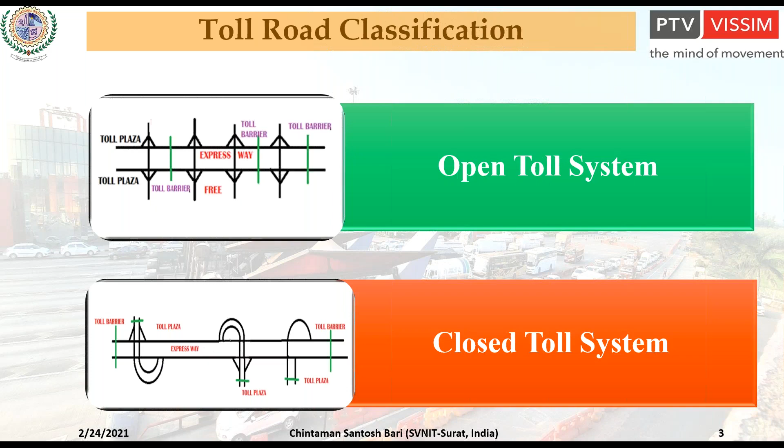In India, we have two types of toll collection systems: open toll and closed toll. In open toll, we have to pay toll after a particular distance. But for a closed toll system, we have to pay toll for each entry and exit. Since 2014, we have implemented FASTag, an electronic toll collection system, but we also have the manual toll collection system.

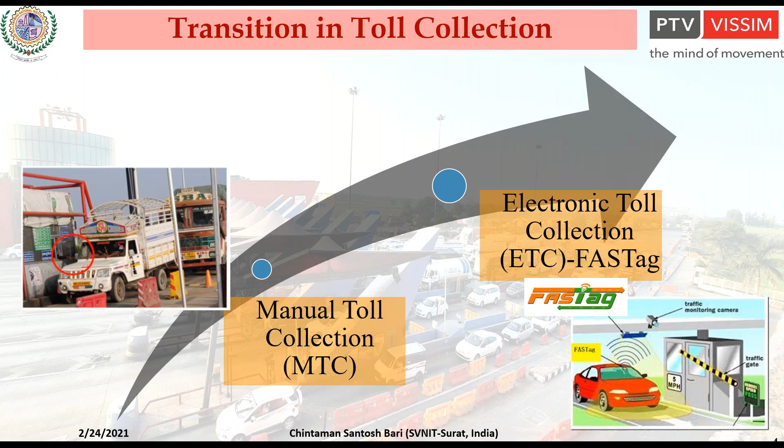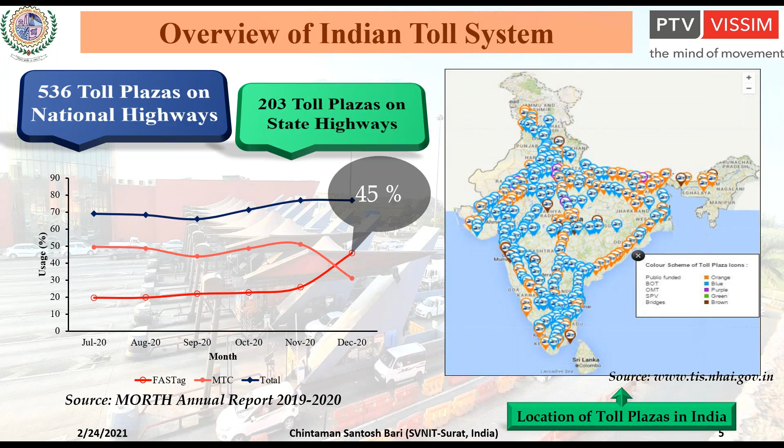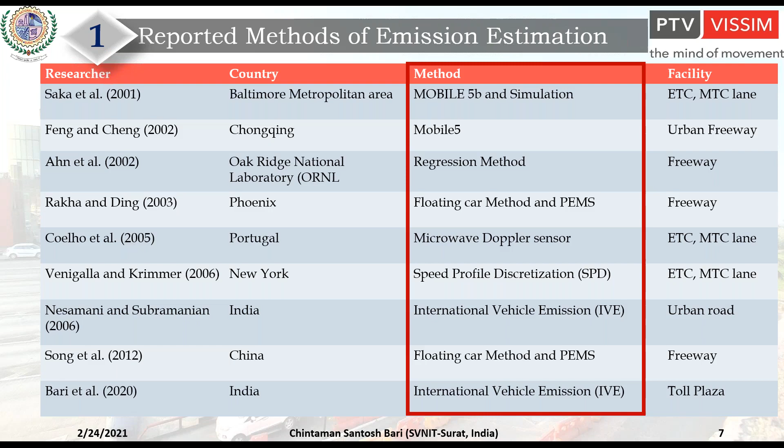For the present study, different literature has been reviewed for emission estimation. Different researchers from different countries carried out emission estimation using different software such as IVE, simulation, and MOBILE on different facilities. But emission modeling at toll plazas under mixed traffic conditions has not been studied yet.

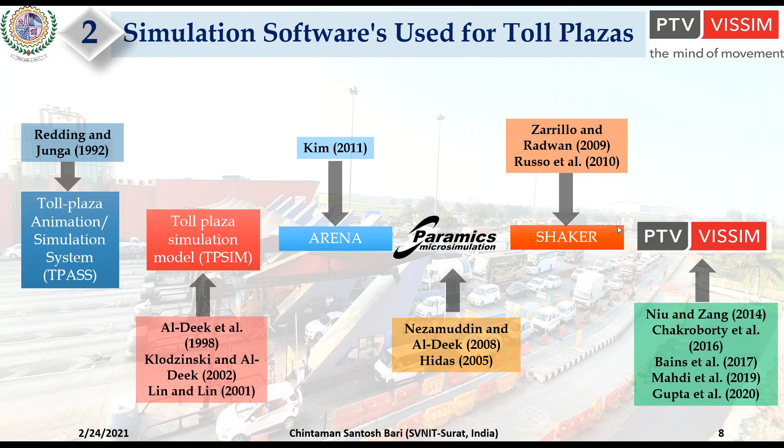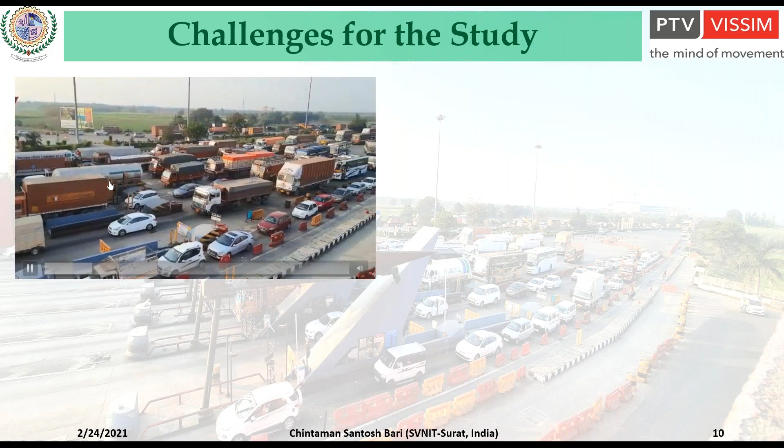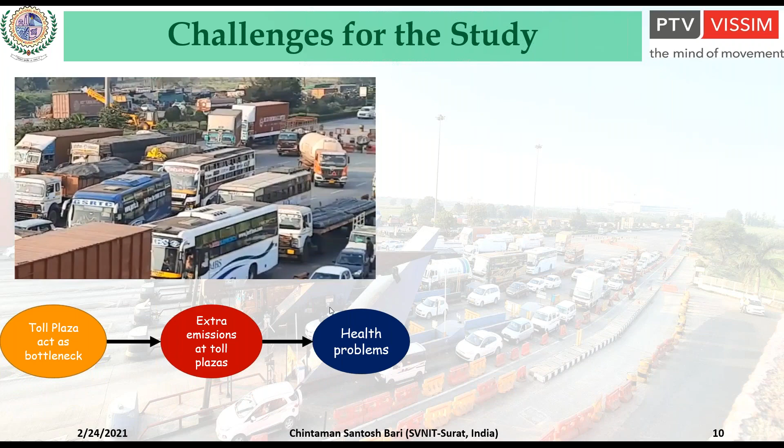So what is the need and challenge for the study? Considering Indian traffic, long queues get developed in peak hours, which causes extra emissions at the toll plaza and health problems to the toll booth operators and daily commuters. Although emission estimation is a time-consuming and laborious process, it is an important one.

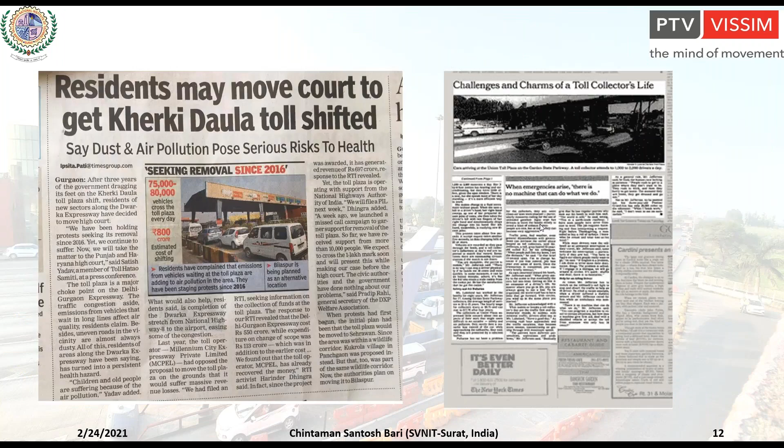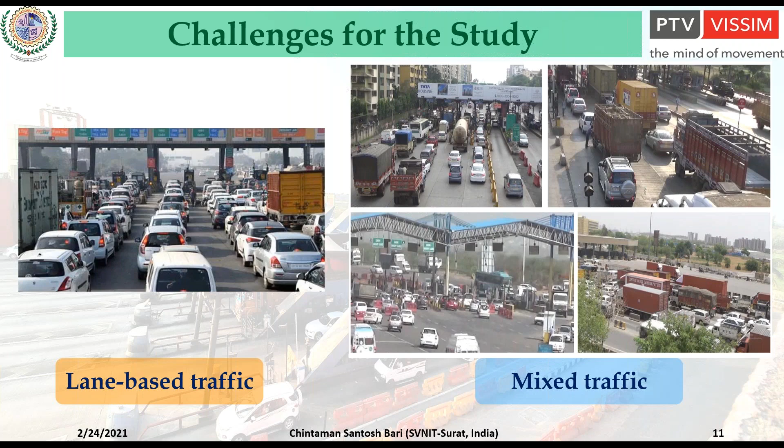If we consider developed countries, we have lane-based traffic. So what is mixed traffic? Mixed traffic means dedicated lanes are present at the toll plaza for each class of vehicle, but due to driver behavior in developing countries like India, different vehicle classes present in each lane cause mixed traffic conditions. This affects service time and thus toll plaza operation.

Further, these toll plaza operations, the delays, and the extra emissions cause health issues to toll booth operators and daily commuters. So the focus of the present study is to develop a calibrated microsimulation model for the MTC method under mixed traffic conditions.

Further, to analyze the impact of presence of toll plaza on the emission parameter at national highway, to develop the regression equation for easily estimation of the emission at toll plaza, and to estimate the emission based passenger car unit factor during MTC and FASTag method.

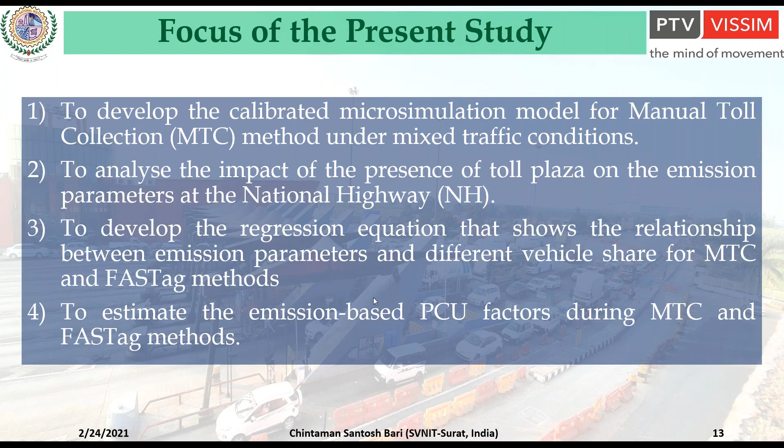So the question may arise, why micro simulation model? As 100% penetration is not yet achieved in Indian traffic condition. Second, the mixed traffic condition is creating problem for the toll plaza operation, which has to be incorporated while the analysis. Third, policies depending upon only observation lead to variable result and thus can be dangerous in terms of monetary loss. Hence, we use the micro simulation software, which is a cost-effective tool, which can help to give an idea well before planning all the things.

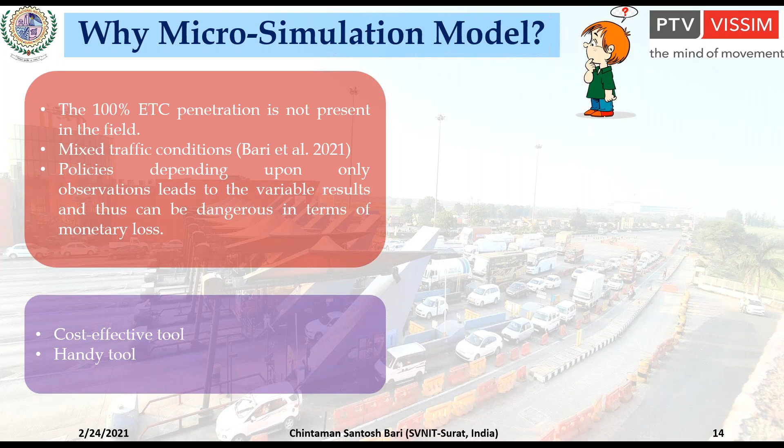Second, it is a handy tool. In our study, we have used PTV VISSIM. So the question is, why PTV VISSIM? It is an effective tool for studying the mixed traffic condition. Second, many researchers have applied PTV VISSIM for toll plaza operation, and it is very easy to understand. Hence, we use PTV VISSIM for our study.

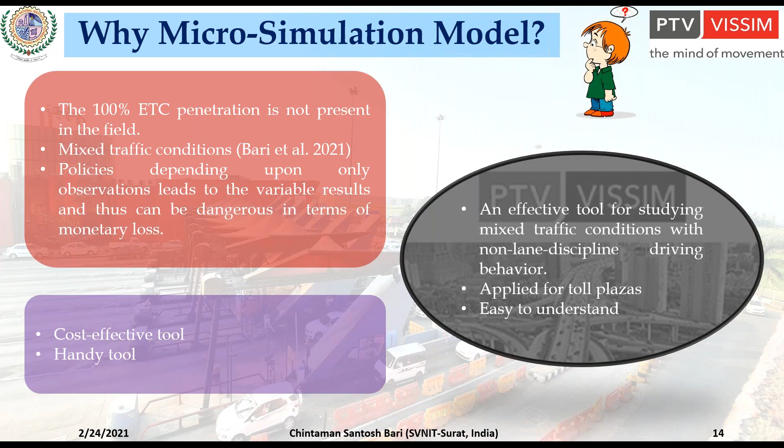For the present study, the methodology is as follows. From the challenges, we have set the objectives. Then for development, we fix that analysis should be done with the micro simulation, and hence for micro simulation software development, we have collected the data with the help of videographic survey and performance box. In model simulation development, the important aspect is calibration and validation. After that, the scenario analysis is done for emissions, followed by results and conclusion.

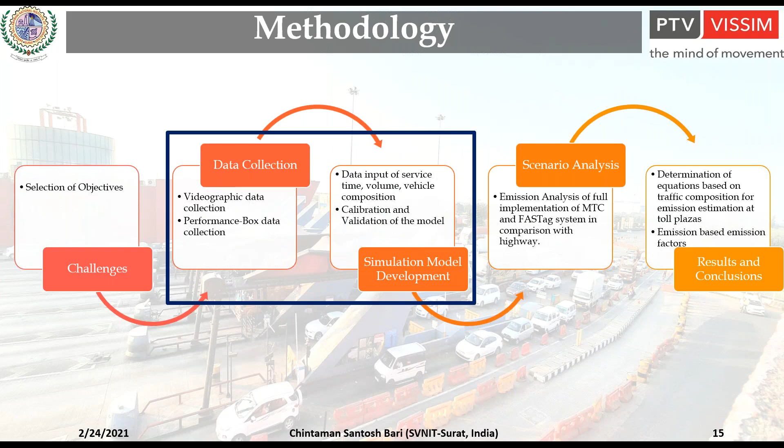Considering the methodology part, the data collection and simulation model development is a very critical part. So what is the requirement for simulation? For requirement of simulation, the field data is necessary. For the present study, the field data is collected at Ghoti Toll Plaza.

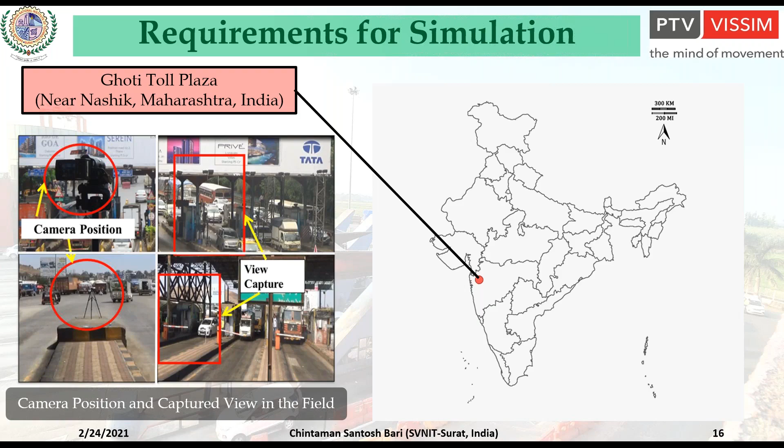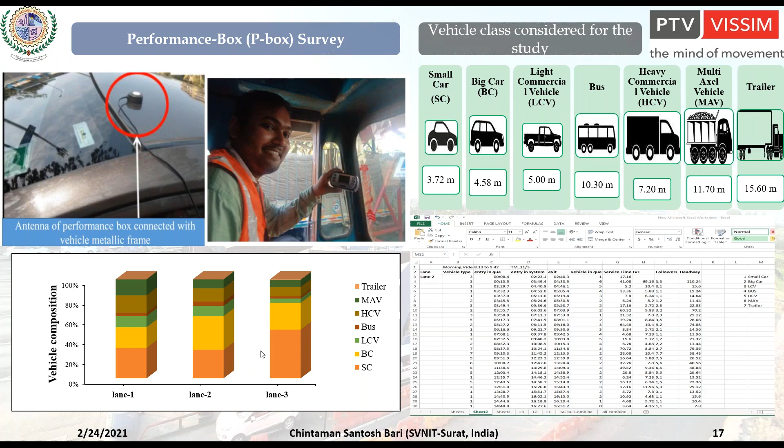So moving forward, the base model development in VISSIM. For development of any model in VISSIM for toll plaza operation, we require 3 parameters: geometric, traffic, and simulation. The geometric parameters such as approach lane, toll booth location, are taken from field observation. Traffic parameters such as vehicle type, arrival volume, speed profile are taken from the field data collection, that is videographic survey and P-box.

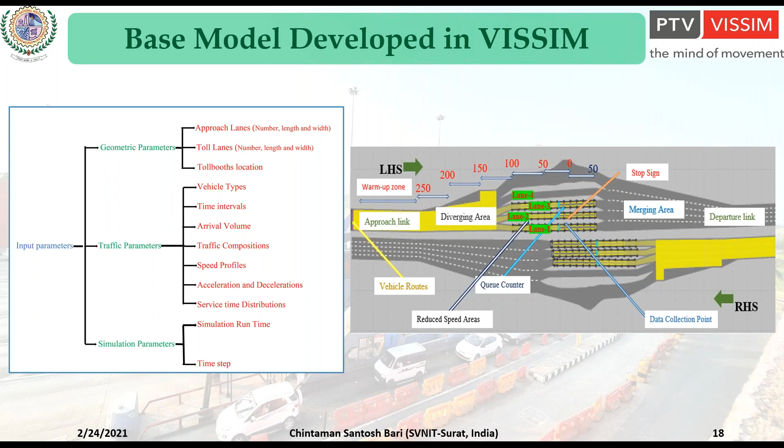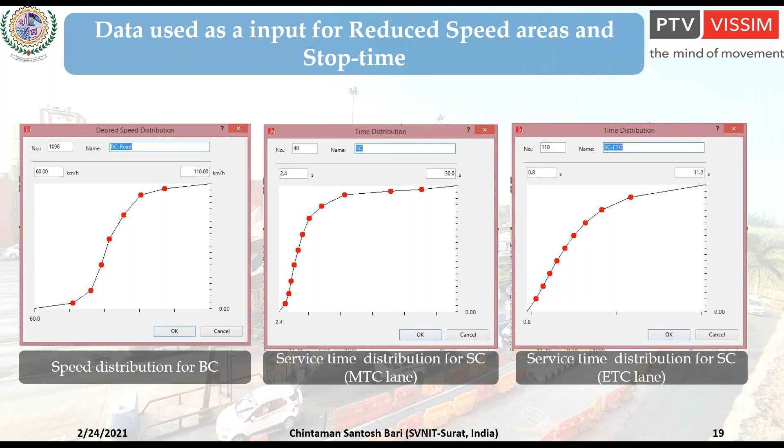The figure shows the developed VISSIM model, which consists of different links, stop sign, reduced speed area for each 50-meter section, which is incorporated for the service time and the queue delay operation. This is the input which is given to VISSIM for the reduced speed area and the dwell time distribution for stop time in the form of CDF.

The important step is the calibration and validation of the VISSIM model. Here we have used the Wiedemann 74 model, which is used by most researchers in the study for the toll plaza operating under mixed traffic condition.

Here, first we define the base model, then the model is run, then the field and simulated values are compared. If the field and simulated values are under the prescribed limit, which is checked by the statistical test, in our case we have used the GEH statistic, then those factors are considered. If not, then iterations are done again and again till we reach the proper calibrated value.

Now for validation, the GEH statistic is used, and it says that if the value is below 5, then the model is well calibrated. Here, as you can see, the GEH statistic value is 1.56 and 1.01, so we say that the model is well calibrated.

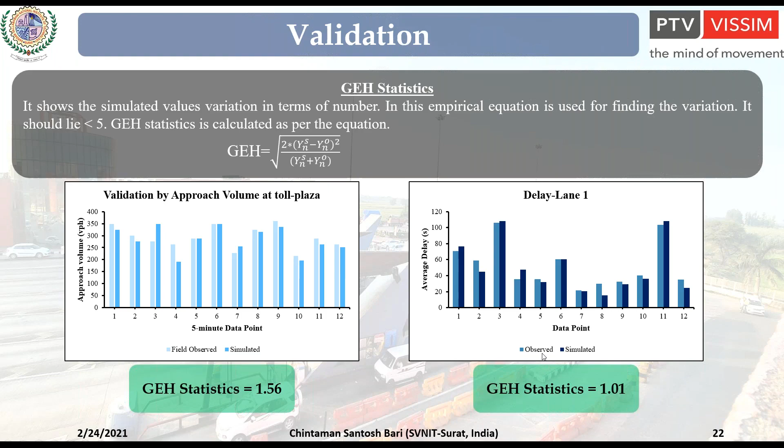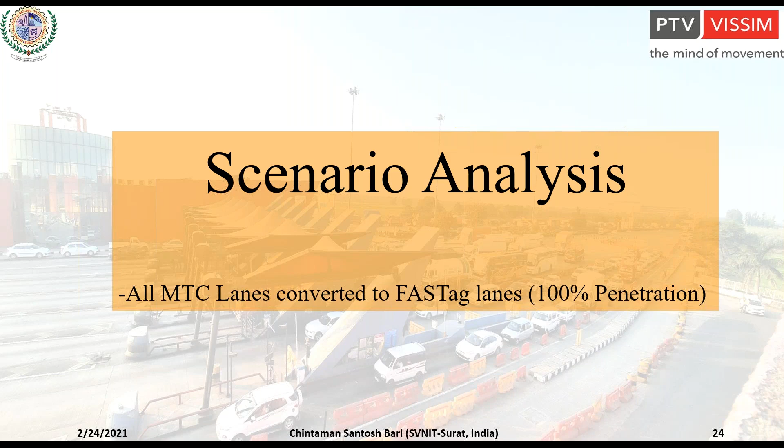So the main step is after scenario analysis. Here, as we are not having 100% penetration of FASTag lane, we have converted all MTC lanes to FASTag lanes. Here, first impact of presence of toll plaza on emission is carried out. It is observed that due to the presence of 100% MTC lane, the emissions are maximum for each category.

That is carbon monoxide, nitrogen oxide, and volatile organic compound. On comparison with the MTC lane, the full implementation of FASTag decreases emission by 317%. These equations are developed for easy estimation of the emission on the field for different category of emission, such as CO, NOx for MTC and FASTag lane.

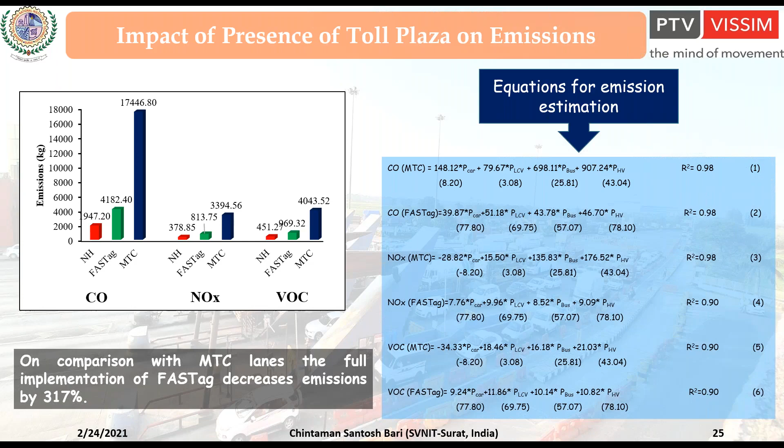Lastly, the important thing is the development of emission-based passenger car unit. EPCU is the emission of the ith category upon emission of the car-th category. It is seen from the figure that the EPCU values of the MTC lanes are more than the FASTag lane. If we consider the EPCU of MTC lane, it is 1.84, 5.02, and 5.14 times more than the FASTag lane.

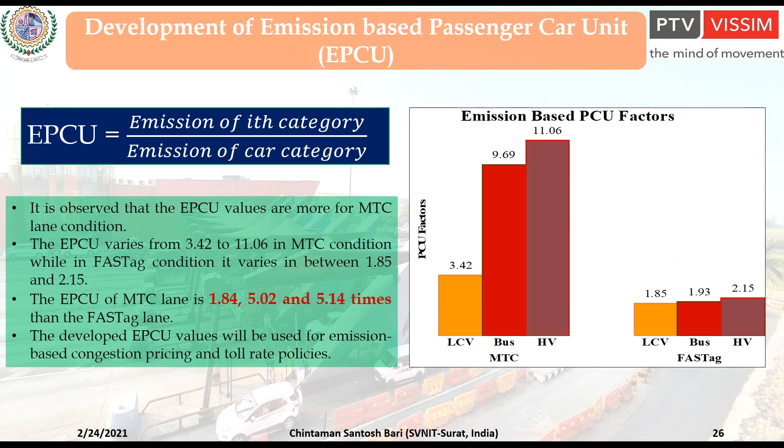So why is there a need for EPCU? The developed EPCU values will be used for emission-based congestion pricing and toll rate policy.

So these are my inferences from the study. The PTV VISSIM micro simulation model accurately represents the toll plaza operating under mixed traffic condition. Further, the results show that operating the toll plaza on MTC method shows an increment of emission of 96%.

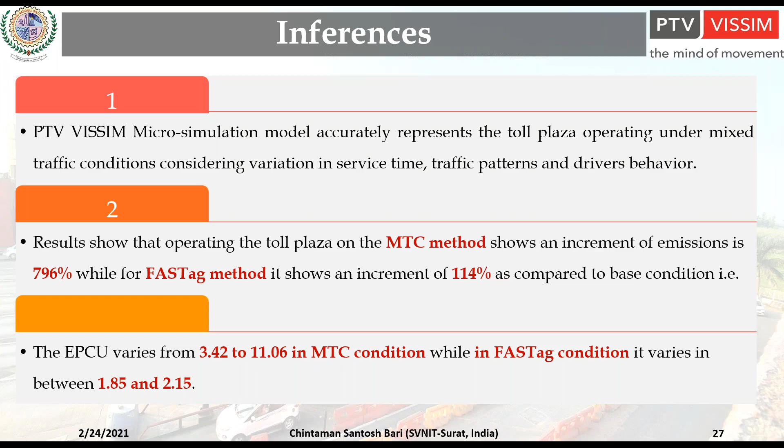While for FASTag method it shows an increment of 114%. The EPCU varies from 3.42 to 11.06 in MTC condition, while in FASTag condition it varies between 1.85 and 2.15.

So way forward, in the present study we have received a grant from the Government of India and Government of Germany for the warrants for automation of toll plaza under mixed traffic condition. My project guide is Dr. Ashish Dhamaniya, who is Associate Professor at SVNIT Surat, and our co-German partner is Professor Constantinos Antoniou, from Technical University of Munich. So the present model will be used in this study.

I acknowledge TEQIP, which is a government initiative, for giving the project of development of warrants for automation of toll plazas in India, and I also acknowledge PTV VISSIM for providing the platform for sharing my work. These are my references. Lastly, I want to say that we are moving towards an open toll system now, and we know that it will provide better results.

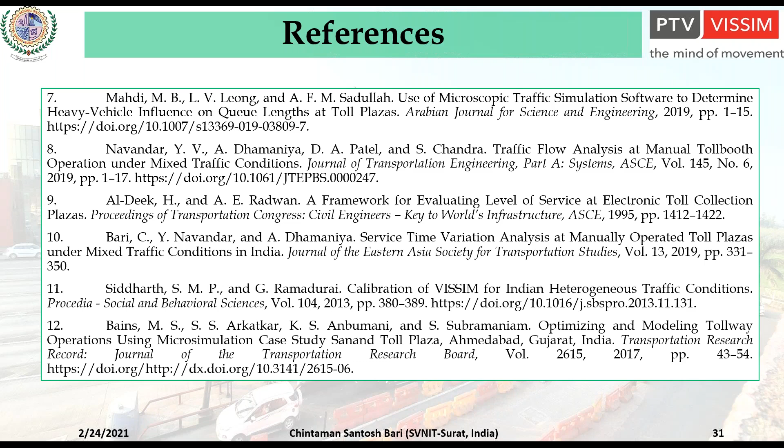But as the quote says: I have been impressed with the urgency of doing. Knowing is not enough, we must apply. Being willing is not enough, we must do. Thank you.

Thank you very much. Well, now it's Marilo talking. I will apologize first if there is a lot of background noise, but thank you very much, Chintaman, really good presentation. Thank you, ma'am, thank you.

And I will proceed with some of the questions that we have. No, our pleasure to have you here. Thank you very much. By the way, I'm going to say to the audience that you were selected because this paper was accepted in the last Transportation Research Board annual meeting, so congratulations also on that.

Thank you. So the first question is, how did you calibrate the lane usage percentage in PTV VISSIM? Ma'am, for the lane usage percentage, we have used the lane choice behavior that is there.

So whatever we have observed in the field, we have done that, using that lane, ma'am. Okay, so then I forgot that name. No worries, no worries.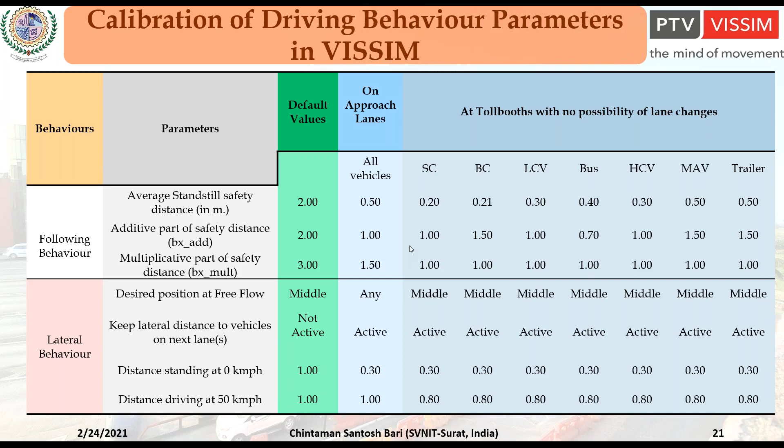First we take one trial, then we check the volume and the field delay. If the simulated and field delay match, we stop. If not, we repeat the procedure.

And statistical significance is checked with the help of the GEH statistics. Exactly, you'll explain that later. Yeah, sure, okay.

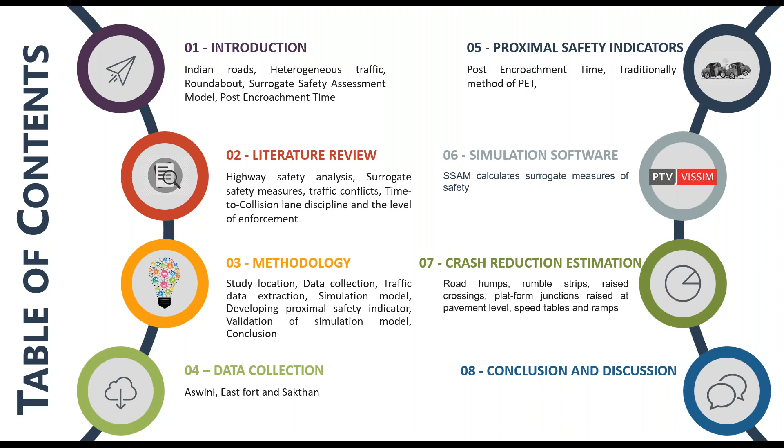This is my table of contents. Broadly, we will discuss eight topics: what safety analysis is, and how PTV VISSIM helps us, based on traditional methods, in calculating safety measures at rotary intersections. That's all, and then the introduction.

I took the study area as India, specifically Kerala. It's located in Thrissur, a small city, which I took as the study area. Based on that, the remaining process and methodologies were followed.

The road safety of road users is a major concern for both developed and developing nations, because national economy and people's welfare depend largely on safety measures. In India, 17 people were lost every hour, as recorded in 2011.

This accident rate, especially in the road sector, is not decreasing—it's increasing to 26 lives per hour as of 2019. So we need a reliable strategy to prevent these accidents, and a high percentage of road accidents are mainly due to human error, nothing else.

Based upon pedestrian and vehicle interactions, maximum driver behavior and human errors are causing these road type accidents. In India, we have heterogeneous traffic conditions. If you take other developed countries, they are doing homogeneous traffic, but being a developing country, especially in India, we have heterogeneous traffic conditions.

So the first and foremost for developing any road sectors, safety measures are the most important for us. And for road intersections, I have taken a roundabout.

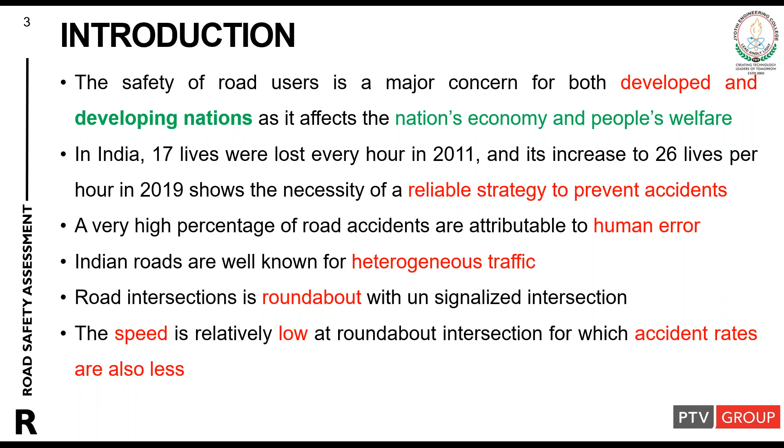The proper planning of the roundabout is necessary to reduce the percentage of deaths and injuries on the roads. So the easiest method to predict or make a planning, microscopic traffic simulation is the best method, time saving and effective, and we can do many simulations.

It's a convenient method to analyze the safety measures, because we cannot implement something after doing the safety analysis of what we cannot do. Before that planning or analyzing, this micro simulation traffic method is a useful method.

So I have taken for the safety analysis a surrogate safety assessment model, made from the PTV VISSIM software, using the vehicle trajectory data file that is an output we can get from this software. This output file is useful to model or evaluate the safety measures planned in the road structures, and we can calculate it to identify the conflict of vehicle interactions.

For that purpose, this surrogate safety assessment model uses a trajectory file, and there is a proactive evaluation to assess the safety level of intersections using the post encroachment time method. This is an indicator for the safety measure, the post encroachment time, and this method is a proactive evaluation method.

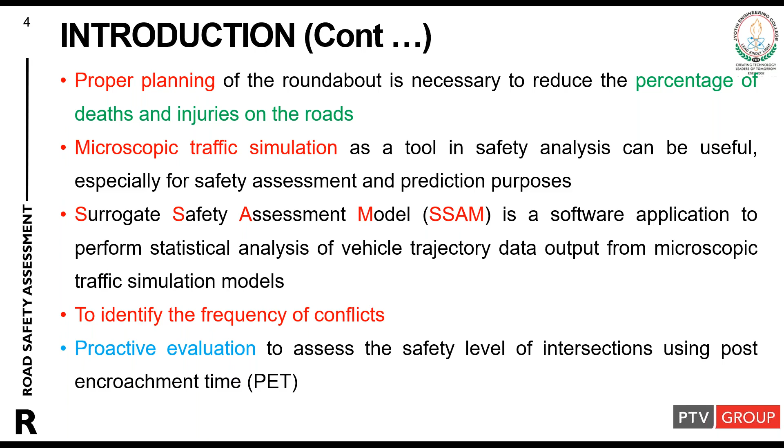In the literature reviews, I have searched so many papers. Most of the current literature covers highway safety analysis for both developing and developed countries, both in India and abroad, where traffic safety and risk evaluations have been conducted using traditional methods.

Maximum researchers are doing traditional methods, but nowadays some researchers are doing micro simulations. For the traditional method, they have taken historical crash data for making statistical methods or analytical models from a predictive analysis.

But this surrogate safety measure concentrates more on traffic conflict techniques - that is the main concept. This measure, as a trajectory file coming out from VISSIM, they take out the traffic conflict techniques. A large number of studies have been carried out to develop and apply different indicators.

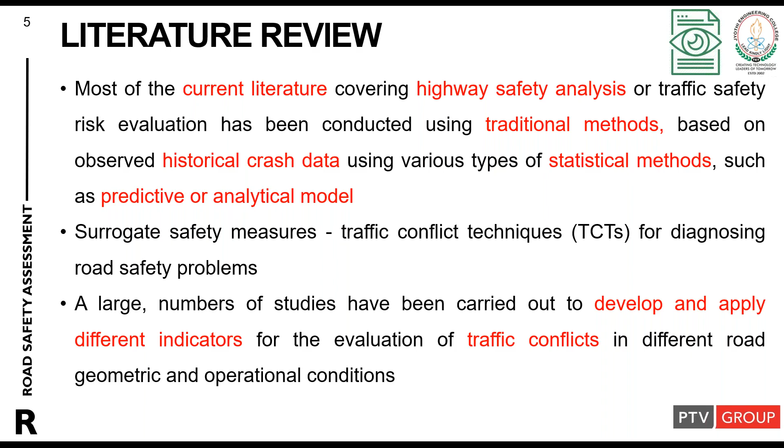We have around 38 indicators only for safety measures, based upon the literature review I have taken out, with different indicators for the evaluation of traffic conflict in different road geometrics and operational conditions.

As I told you before, there are 38 major proximity indicators used to analyze this safety analysis, and among them, mainly some researchers concentrate on the time to collision between vehicles, like a rear end collision.

What is the time between the rear bumper to the front bumper of the vehicles? They are calculating road sections, time to accident, headway, critical gap, deceleration rate to avoid crashes, and potential index like urgent decelerations, and required braking rate. These are the major proximate indicators used by researchers to identify safety measures in road sectors.

Almost all applications are mainly concentrated on traffic conflict techniques related to developed countries, where lane disciplines are good and the level of enforcement is very good. In developing countries, it's mostly heterogeneous traffic conditions. But on the other hand, for India as a developing country, it's the reverse scenario: there is a lack of lane discipline due to driver behavior, but there is a very low level of enforcement available.

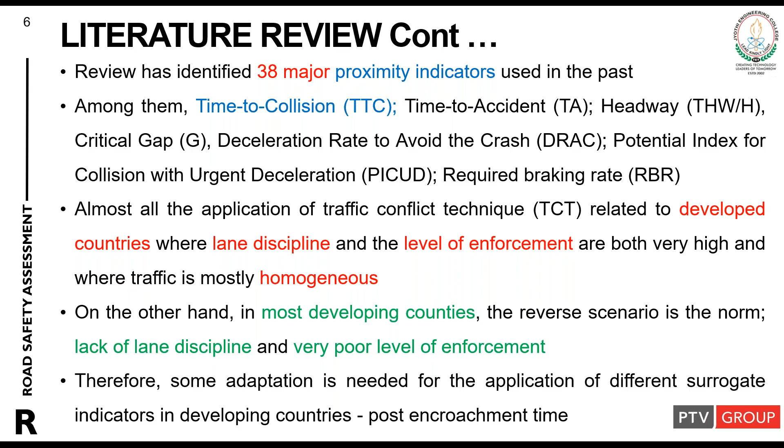And this is my methodology. First, I have taken the study area data collection, based upon accident data, road inventory, videographic surveys, and then traffic data extraction based upon classified vehicles and conflict zones. Simulation is then done based upon road inventory details, volumes, and speed of vehicles. Using the software PTV VISSIM, I developed proximal safety indicators, that is a surrogate safety assessment model, validated using another add-on software called SSAM.

It's a software developed by the Federal Highway Administration, so it's free software. By using that, we can extract the data and reduce what is happening in the inbuilt background of what PTV VISSIM produces in road safety analysis, and also validate the model.

And the conclusions: the PET, post encroachment time data, was extracted using overlay techniques of CAD images on the video files. This is a traditional method to evaluate the conflict between vehicle and vehicle in the road sector, based on CAD images. They made check boxes, and then a sensitivity analysis should be performed using a well developed and validated microscopic simulation model.

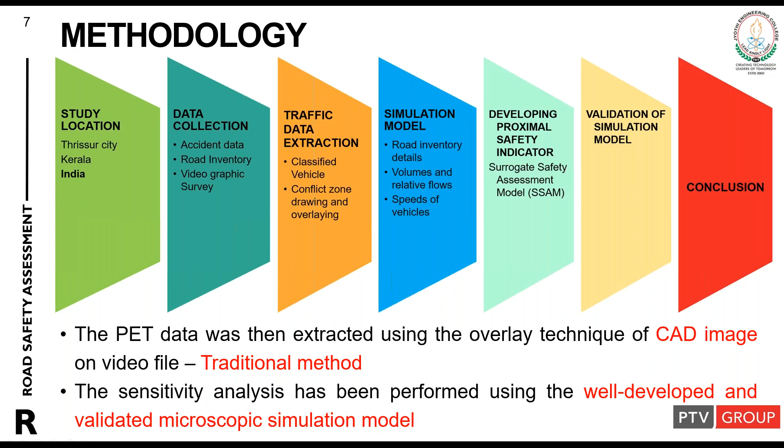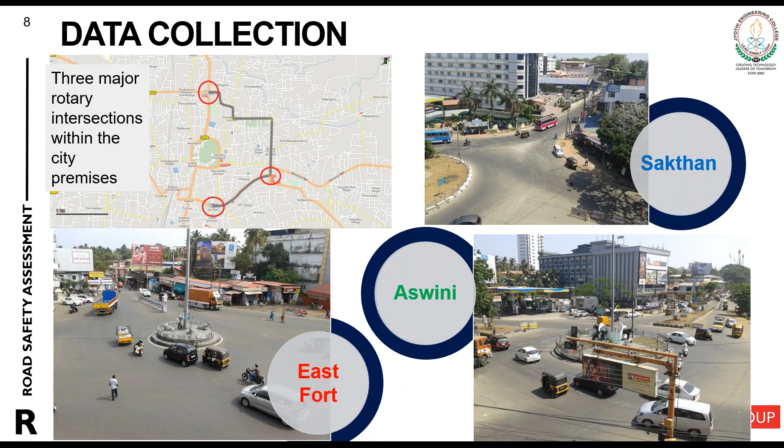So I have taken three locations, Sakthan, Aswini, and East Fort - these are local names of the roundabouts. And then I used PTV VISSIM for simulating and making the road geometry conditions.

In PTV VISSIM, we have two types of mapping systems: one is aerial view, and another is PTV default. In the aerial view, you can see the image, it's like a Google map, what we see in Google Maps as satellite view is the same as that aerial view. This image is taken from the latest version of 2021.

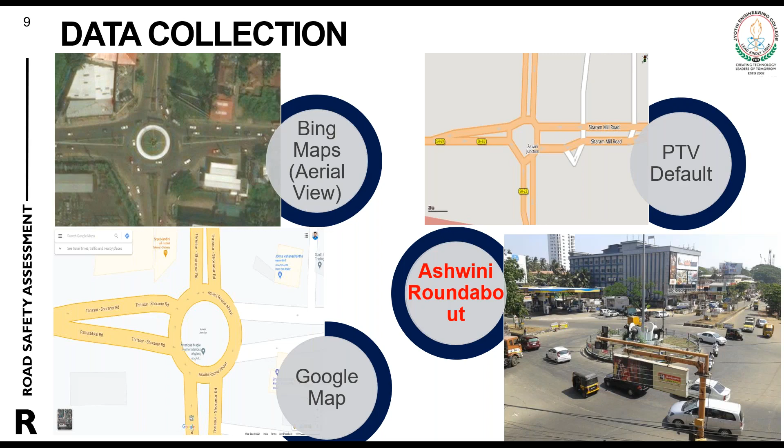If you take the PTV default, we can see the generalized Google map view. That is the view for the map we have taken from the PTV group software, and it's actually the same as the remaining study areas.

I compared four things: the aerial view taken from PTV VISSIM, the default view from PTV, the Google Map, and the actual field condition based on photographs. Most of these four images are in the same condition to evaluate and use PTV VISSIM, so the field study and the simulation study are more or less similar.

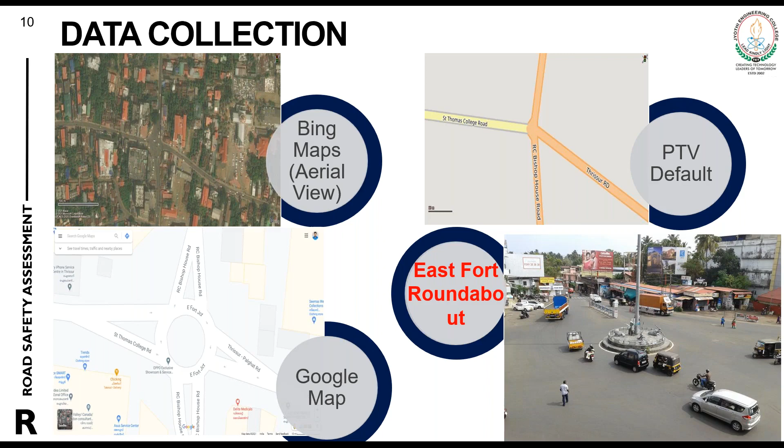If you take the remaining software, there are a little bit of changes. Why I'm choosing PTV VISSIM is because it's user friendly. After the data collection and analysis, this is why PTV VISSIM is used.

So the main concept is proximal safety indicators. The main factor is a safety indicator that is applied to the road geometry conditions. Let us see how this is applied to the road geometry conditions.

Traffic safety analysis is normally based upon accident data only. We will say this road section is more congested, more accident-prone, or a black spot area, based on accident data. It's a traditional method - an after-the-fact or reactive approach.

So I want to make changes by using this simulation software as a proactive method. That is proximal safety indicators - measuring temporal-spatial measures that reflect the closeness of road users and the projection points of collisions, which we can take as a proactive method, suggesting the significance of short study periods.

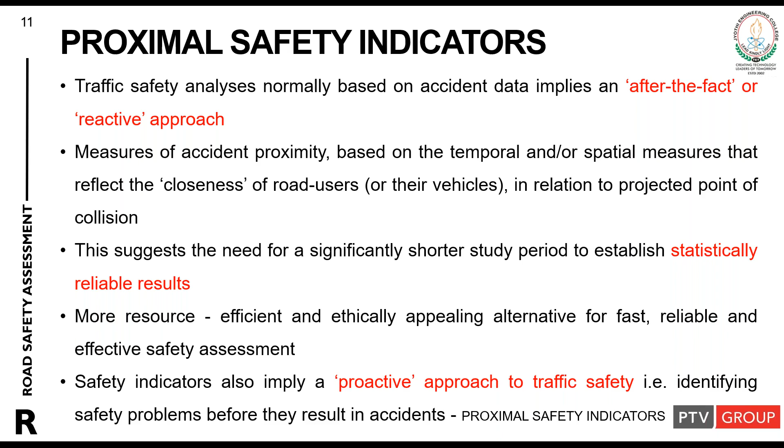So this is the post encroachment time - the time duration between each vehicle. For example, a conflict at a T-junction: one vehicle from the minor road connects to the major road, marked with red color.

When the vehicle is in the conflict area, the first vehicle on the major road wants to move from that point and another vehicle will come to that conflict area. That time duration is called the post encroachment time, or time to collision, or collision time, or conflict time.

This time should typically be 1 to 1.5 seconds, meaning there will be a reduction in road accidents or collisions between two vehicles. This time should be increased - above 1 or 1.5 seconds is nominal for the encroachment time, in seconds only, and this duration should increase.

If it goes below 0 seconds, negative seconds, the micro simulation software will give that answer. If you get negative answers, there will surely be a collision between the vehicles. If you get positive values in the post encroachment time, or surrogate safety measures, meaning time to conflict crossing, there will not be any collision between the vehicles. That is called the post encroachment time.

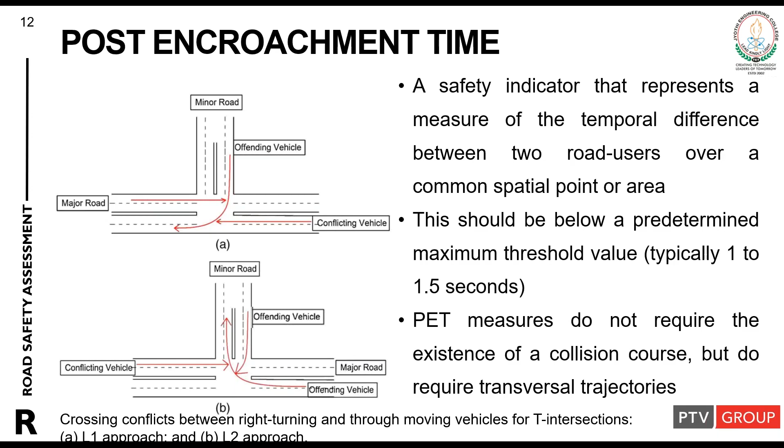That is the time between the vehicle and vehicle, the vehicle connecting from the minor road to the major road.

And then extracting the PET from the recorded video. This is the traditional method for extracting PET values. Because based upon this PET value, we can tell if it's below 0 seconds or below 1 second, there will be a collision. Based upon that we can tell, maybe it's negative, meaning surely we will have a collision between the vehicles. This is a traditional method.

So to reduce this, we have taken a simulation software, PTV Vissim. Why did I take PTV Vissim? It has advantages. The major variables used in this software are flow, vehicle composition, speed, desired speed, turnings and main lanes movement, acceleration, deceleration, lane configurations, gap acceptance and rejection, headways and standing distance, and level of service. These are the major variables we can use in this simulation software.

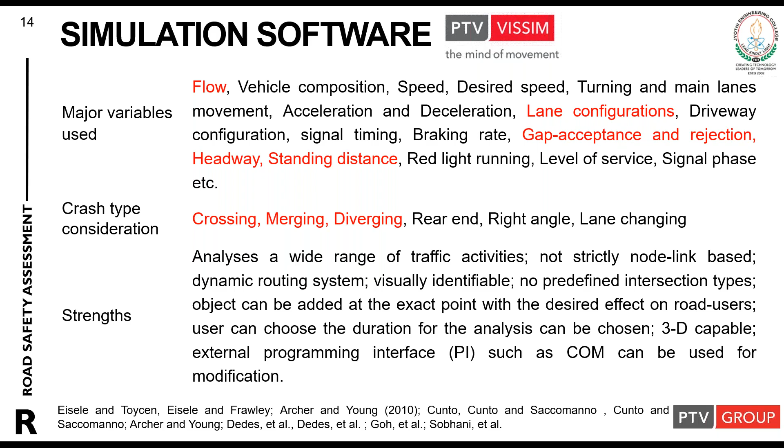These are the data I aggregated from the literature reviews, and I have worked in this software. So these are the advantages to avoid the traditional method and make it an easier method. And then, the Vissim simulator based network.

By using the Vissim simulator I did the project work. This is how I created the road sectors, like the base network. I created volumes, vehicle compositions for each approach intersection, priority rules, and the conflict areas were generated, and a new driving behavior model was added.

The method I used is the Wiedemann 74 car following model, used based upon Indian traffic conditions, and the values are taken by trial and error methods. So I chose trial and error methods, adding Wiedemann-like car following based on vehicle interaction and moving vehicles.

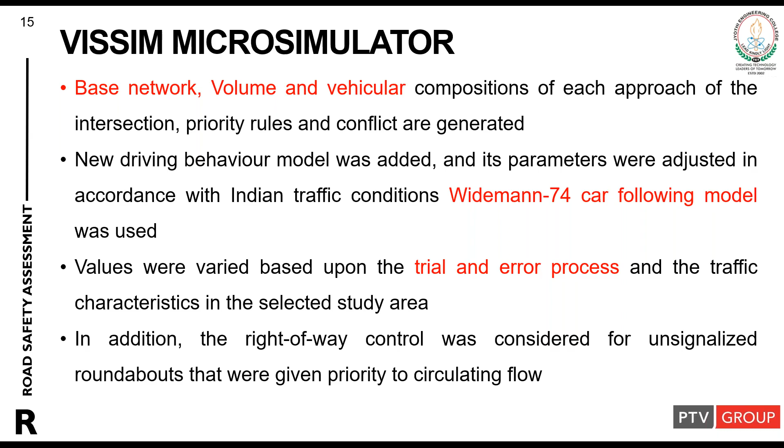In addition to that, right of way controls were also considered. This is an unsignalized intersection, so priority is given for circulating the flow. That's why I took this right of way control. The right of way option is taken from PTV Vissim for these unsignalized roundabouts. So these are the parameters I considered to model my safety measures in PTV Vissim.

Okay, and then please, you should hurry up a little bit. Okay, sorry for saying this. No worries, it's perfect, and I'm enjoying it, but unfortunately we should finish on time. Thank you. Okay, thank you.

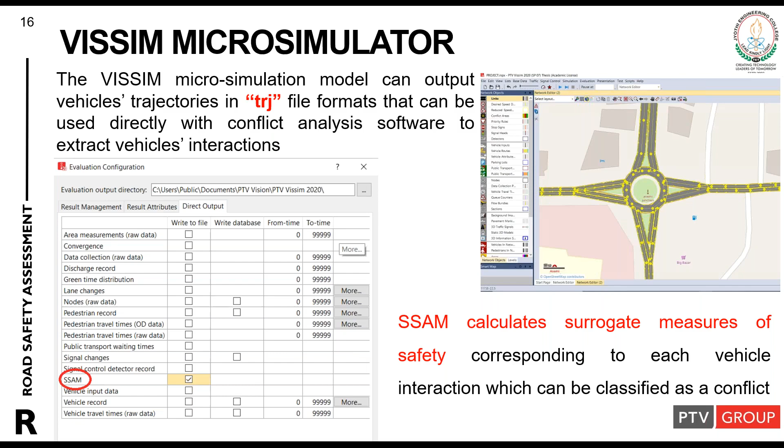Vissim is a micro simulation model, and the output file is a trajectory file. We can get it from the evaluation configuration, that is SSAM. You can get that output file as a trajectory file. If you click this option you get that output file, and this will be useful for SSAM to calculate the surrogate safety measures. This is an output file we can get from Vissim.

And then I have added the traffic calming devices. Why?

For roundabouts, whether signalized or unsignalized intersections, we don't necessarily have to provide traffic calming devices, but to control road safety, we provide traffic calming devices as a practice. So the traffic calming devices are road humps, rumble strips, and speed tables, and some of these devices are installed and evaluated.

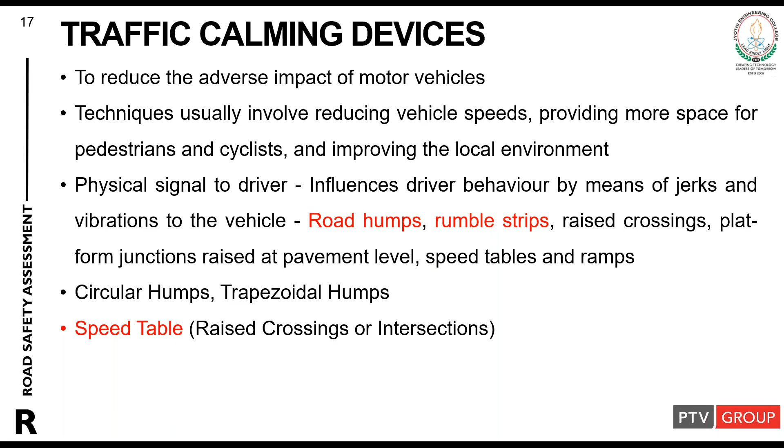These are the traffic calming devices added in Vissim. For the speed tables, we can add them using the link and offset. We use speed tables as raised tables, and speed bumps are also installed, along with rumble strips, to reduce vehicle speed, as well as speed humps. The bump is of smaller height while the hump is of heavier height, to restrict sudden changes in vehicle speed.

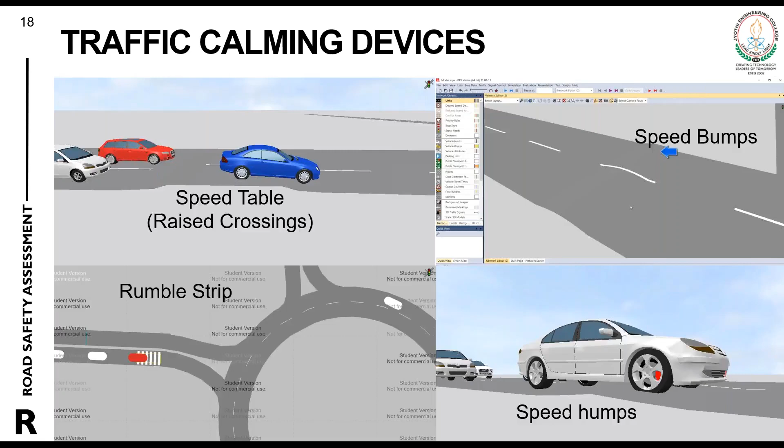So for roundabouts, I have provided these based upon the IRC code. And then surrogate safety measures is a model.

I told you about the second software used to calculate time to collisions and post-encroachment time. This software is developed by the Federal Highway Administration. The output file we get from SSAM is a trajectory file. It's free software available from the Federal Highway Administration.

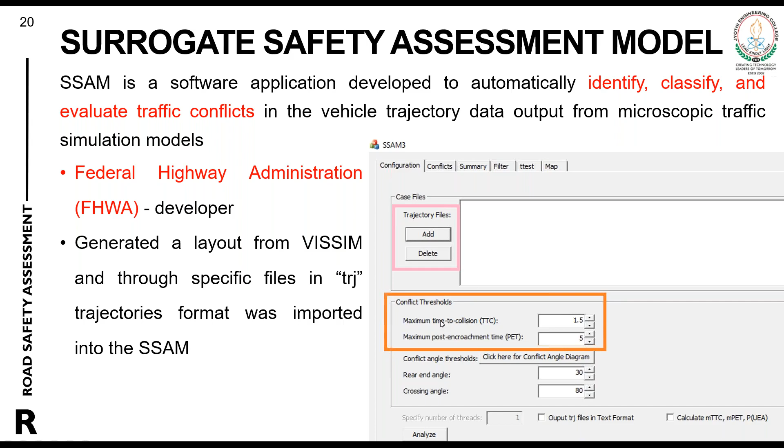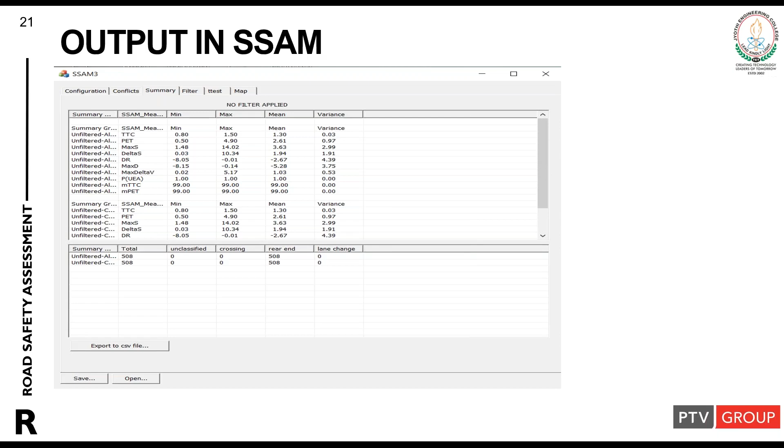Using this software, we get outputs like minimum and maximum collisions, and the variance of the collisions, PET values, and safety measures from SSAM. The results, using crash reduction estimation, show how traffic calming devices like bumps, rumble strips, speed humps and speed tables have been adopted, with bumps included.

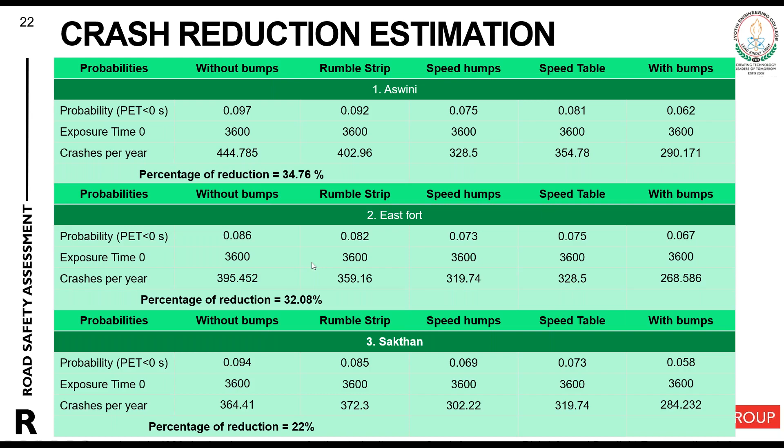And the conclusion is that the present study highlights the importance of microsimulation in safety evaluation, in terms of PET, post-encroachment time, as a safety measure for rotary intersections.

Likewise, the procedures adopted for evaluating speed bumps and the methodologies are proactive methods, as I described. I strongly believe it's unethical to rely only on conventional accident data for road safety precaution processes. As a transportation engineer, as countries develop, more opportunities arise and technologies improve, such as microsimulation software.

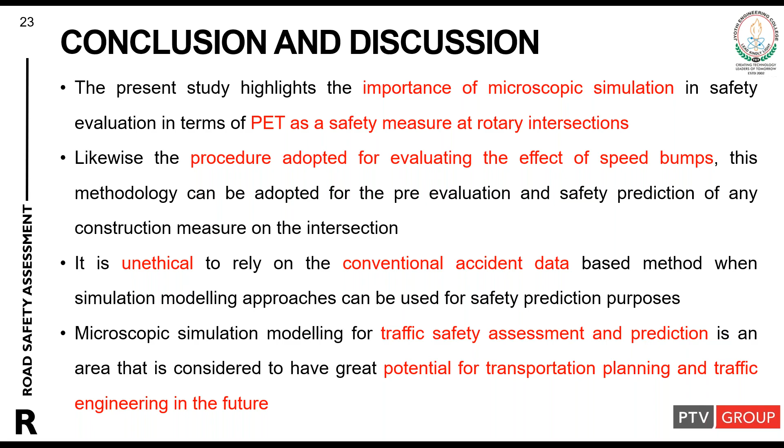So I'm using microsimulation to analyze safety measures for traffic assessment and predictions. This is useful for potential traffic transportation planning, and for traffic engineers in future studies to check whether an area has adequate safety measures or not.

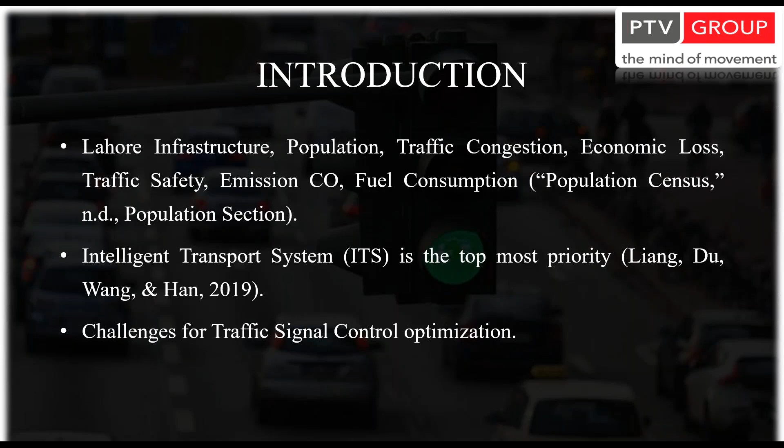Okay, it seems that we had a technical issue. Since we are running out of time, with permission from Masht, I think we should try to reschedule Ahmad for the next presentation, because we want to hear about this agent-based model. What do you think if we call it a session and he presents in the second session? Yes, I think that sounds great, because we are running out of time, and let's give him his chance to explain it properly the way he wanted. It's a really good topic. Yeah, I was reading about it, and it's really amazing. So yeah, we want to have him in the next session. Yeah, please, sounds good.